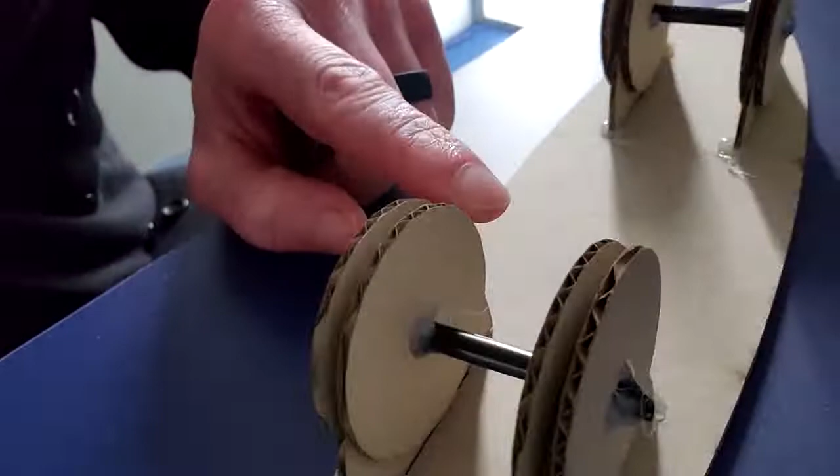Okay, we're going to make this laser cut skateboard. Laser cut skateboard. Yeah. So we've got 2 bits of cardboard on the top for the board. We have 8 wheels with these functional wheels. They rotate there, and 2 straws as axles, and then 4 mounts to hold the wheels on.

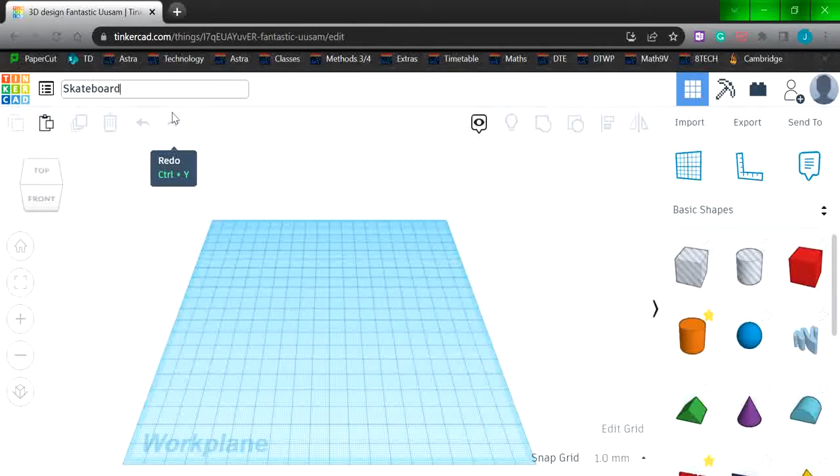Okay, so we're going to make a laser cut skateboard. So click create new design. I'm going to rename this project skateboard. I'm going to change the grid. So click edit grid. We're going to make the grid 300 by 300. And when we're finished, all our pieces should fit in that grid for laser cutting.

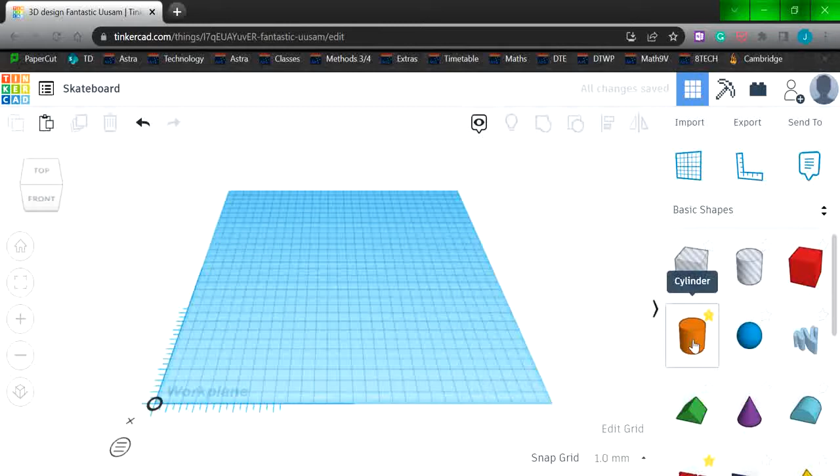Okay, so we're going to first take a ruler and stick the ruler down the bottom left-hand corner of the work plane. And now we have 3 pieces to make. We're going to start with a wheel. So I'm going to grab a cylinder and place that. And this cylinder needs to be 50 millimeters by 50 millimeters. And the height is 2.5 millimeters.

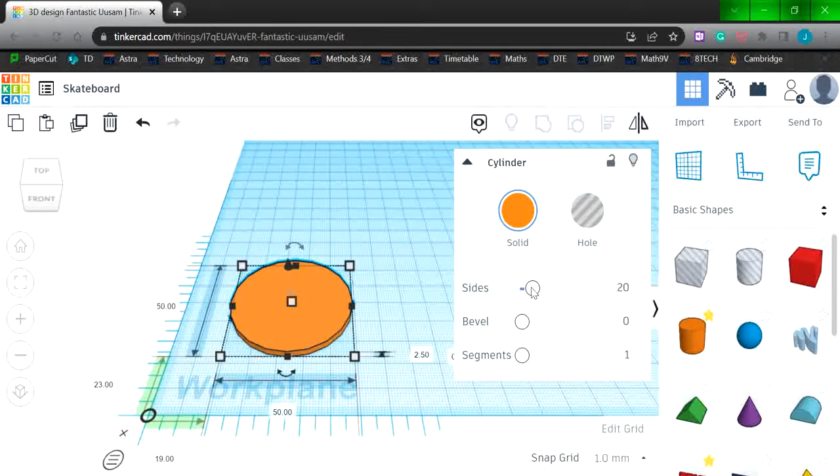The cardboard we have is 2.5 millimeters high, so we need to use 2.5 millimeters for all the thicknesses of our things. I'm going to turn the sides of that right up to make it nice and round. Okay, we need a hole in the center of our wheel. The hole has to have the straw go through it, and the straw is 5 millimeters by 5 millimeters. The height of the hole doesn't matter. You can make that one nice and round as well.

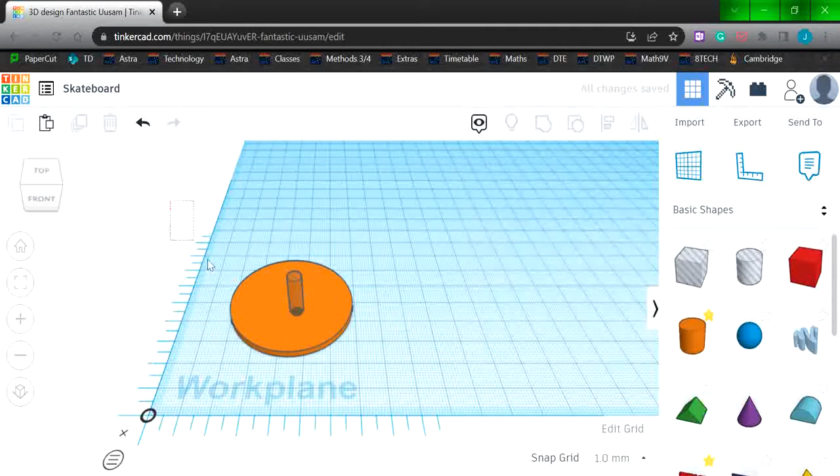And then drag a selection box around both the wheel and the hole. And we're going to use the align tool. So click align up there. We're going to align the centers. So we click on the center, and that puts the hole in the middle of the wheel. I'm going to select both of those things. I'm going to use the group function there to join those together, and that will let the hole cut out the cylinder to make its wheel. Okay, so we have our wheel done.

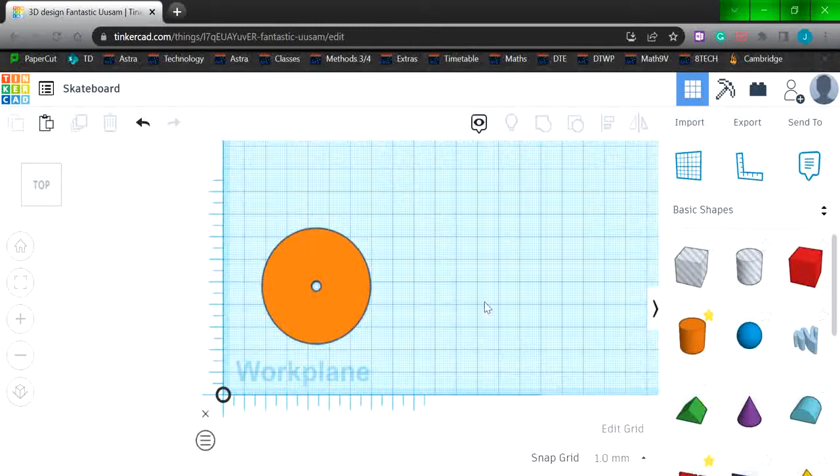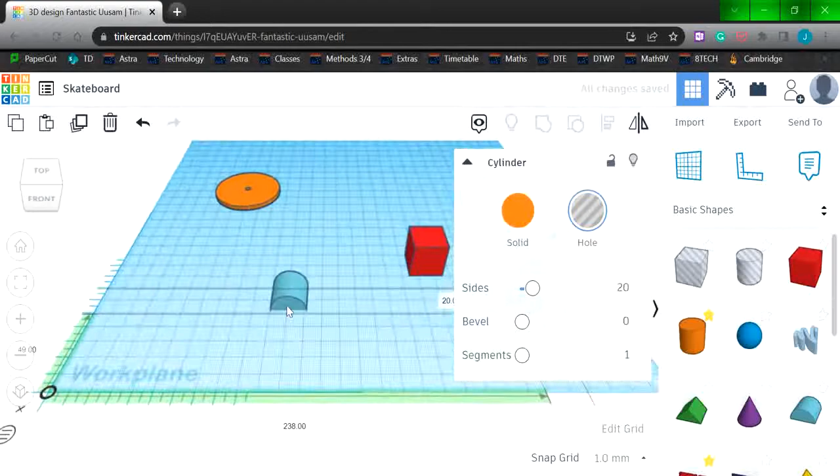Next, we need the mount for the wheel to go through. So this piece is made from a semicircle and a rectangle and a hole. So I'll get those out. Now, our semicircle needs to be rotated 90 degrees. And it needs to be 40 millimeters by 60 millimeters, and it is 2.5 millimeters thick.

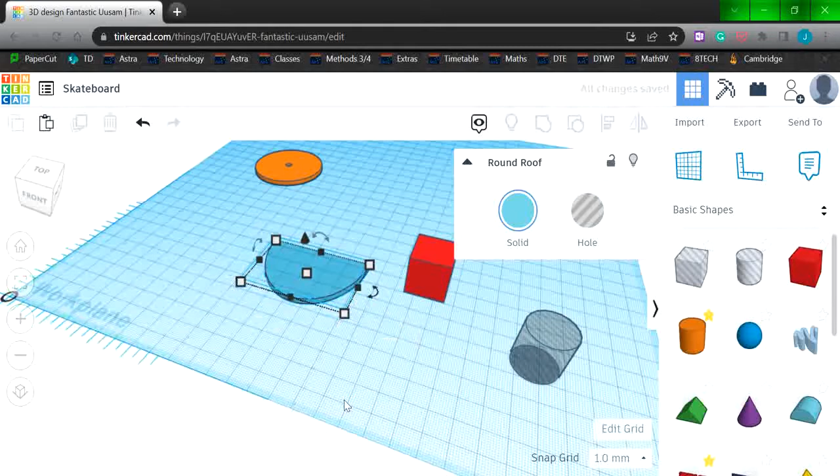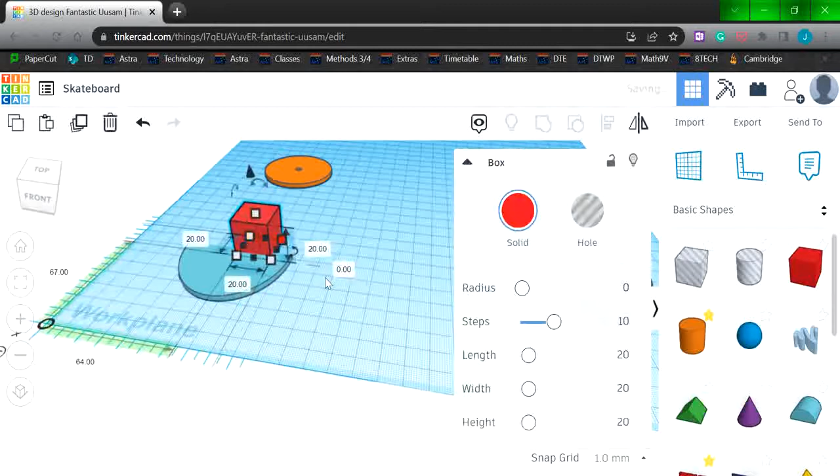And now if you can see, as I move this around here, you can see where it's located based on the ruler, and you can see now at -5 that piece has dropped down below the work plane. So I'm going to make that 0 to put it back on the work plane. Okay, the rectangle now needs to be 5 by 40 by 2.5.

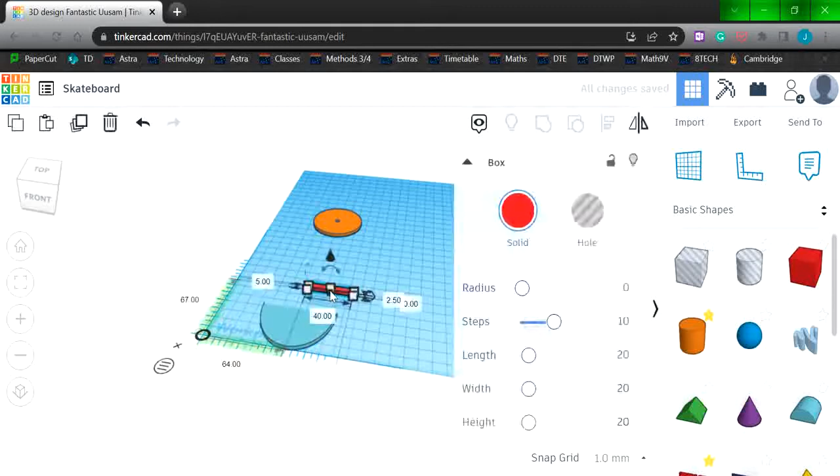And on the ruler here, I'm going to make this semicircle at 0 up, and I can make that rectangle at 40 up, and that will make the rectangle sit on top of the semicircle, and then use the align tool to align their centers. The hole still has to have the straw go through it, so it's still 5 by 5. And it is 10 millimeters high.

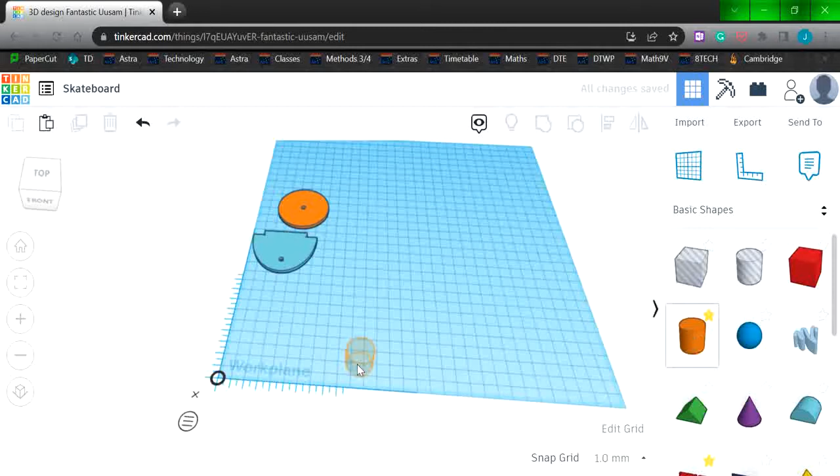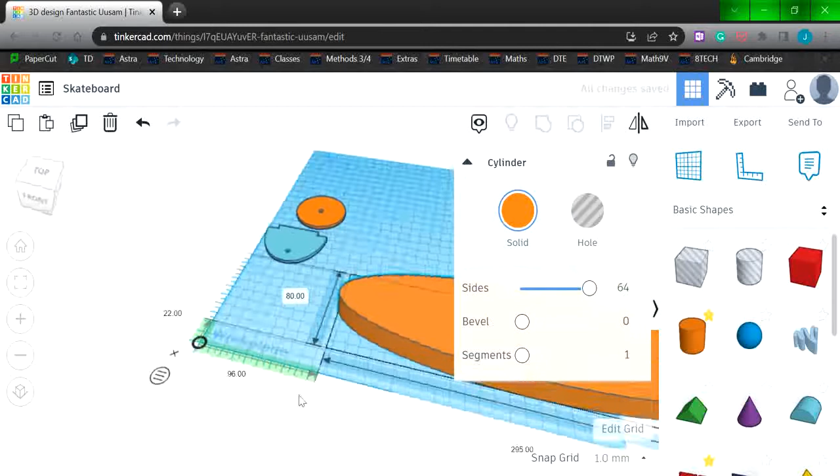And we're going to line those all up now. So all aligned at the centers. And then group those. Okay, so I have my wheel mount done and I have my wheel done. Now I need to do the actual board. So I'm going to use a cylinder for that. The cylinder is going to be 80 millimeters by 295 millimeters. And we're going to turn the sides up to make that nice and round. And we want that to be 2.5 millimeters thick.

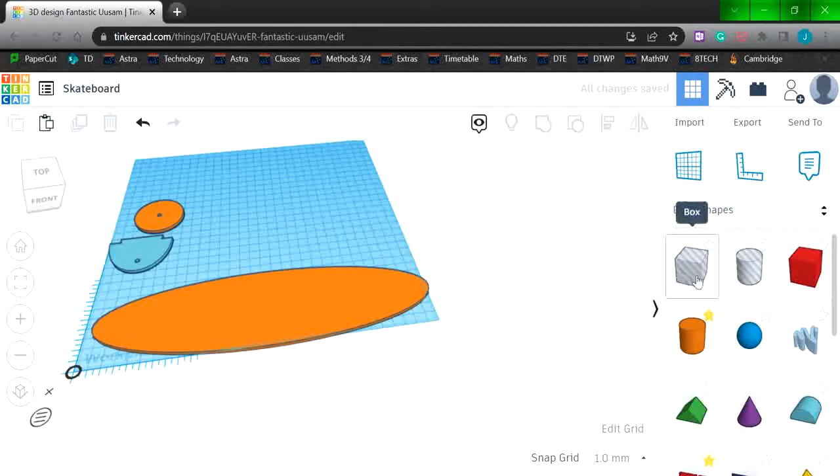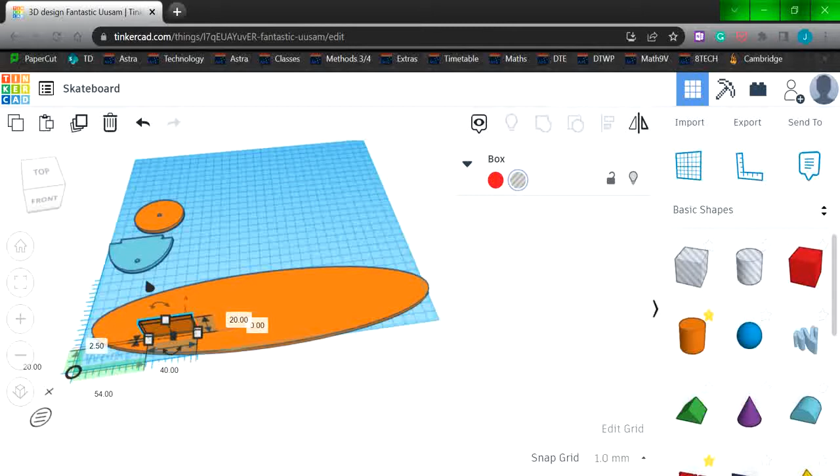And then we need to cut some slots in that so that the wheel mount will go through. So I get a box that is a hole to do that, and that needs to be 40 millimeters by 2.5 millimeters. And then we need 4 of those. Okay, so those rectangles, we need 4 of those.

So Control D to duplicate, and then I want this bottom rectangle here to be at 0 high, and this other rectangle to be at 30, so they are 27.5 mil between them. They're still lined up in their centers, so that's right. Now what I'm going to do is use the grouping tool there to group those. So now they are stuck together.

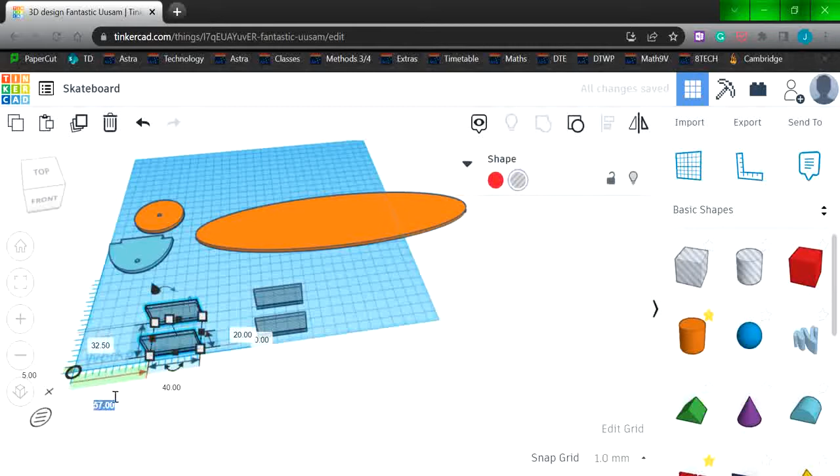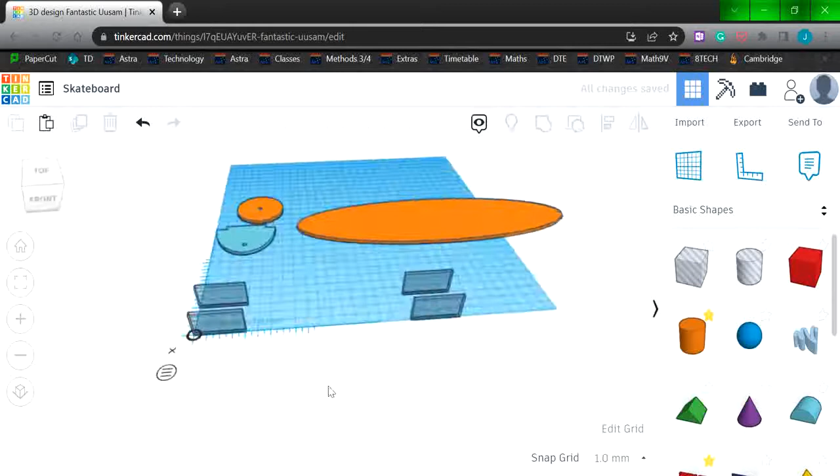And stuck together, Control D to duplicate again, and then I'm going to put this first set in the bottom left-hand corner. And I'm going to put this second set at 175 and also 0. So they're lined up neatly now, and then I'm going to select all of those and group them together.

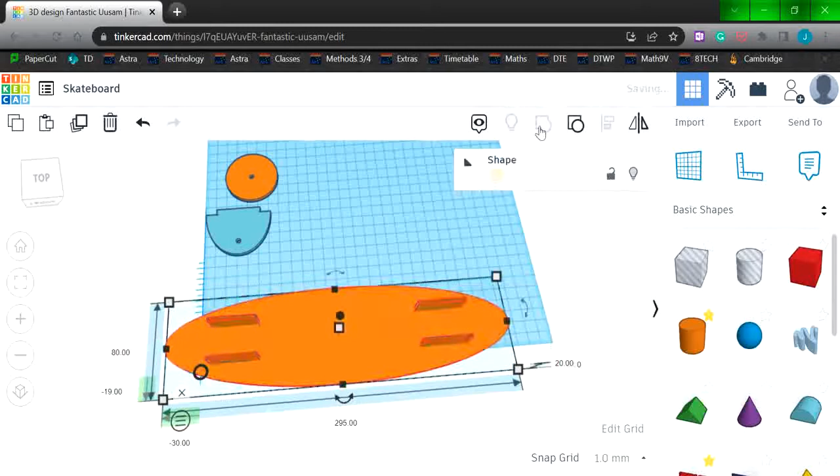And I'm going to bring the board back over here, select everything there, and use the lining up tool. I'm going to line the centers now, so that those slots will be cut out of the center, and then with all of those selected, I'm going to group those together to cut out the holes. Okay. So I now have the top of the board, wheel mount and a wheel.

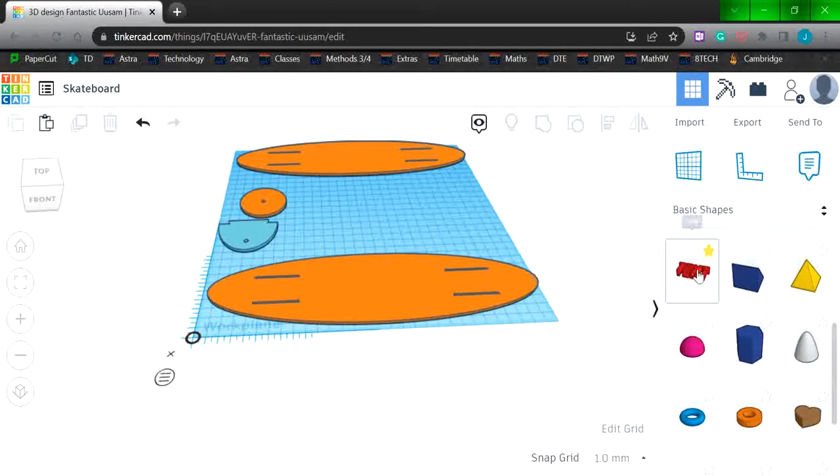The only thing left to do now is to make a copy of the top of the board. So Control D to duplicate, put one over there. And now it's in this layer that I'm going to put some text and whatever other shapes you want to put in there. I'm going to put the word Girton in there. You can put whatever you want in there. You can put your name or something else. So text, I'm writing Girton, and I'll leave all the rest of that the way it is.

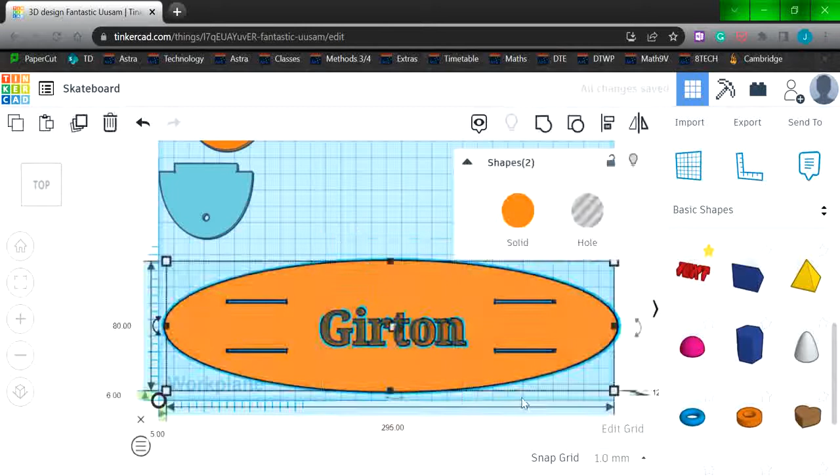What's that doing? Now I'm going to align that so it's in the center again. And I'm going to make the text a hole by clicking hole there, and then cut that out with the grouping tool. Okay, there we go. Now you'll have to be careful depending on what letters you have. You're going to have to fix some of these up.

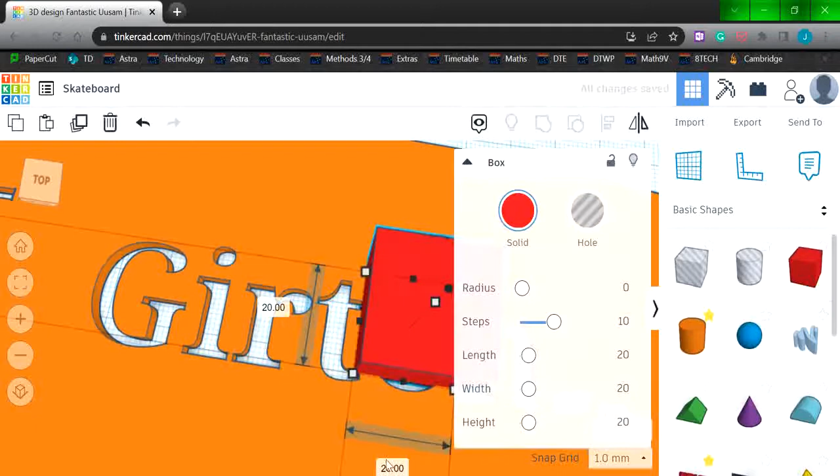So Girton has an O in it. When I laser cut this, the center of that O will fall out, and I don't want that to happen. So what I'm going to do is put a block in here. That block is 1 millimeter wide. The height there doesn't matter. The thickness is still 2.5 millimeters. And I want to line that up so it goes through the center of my O.

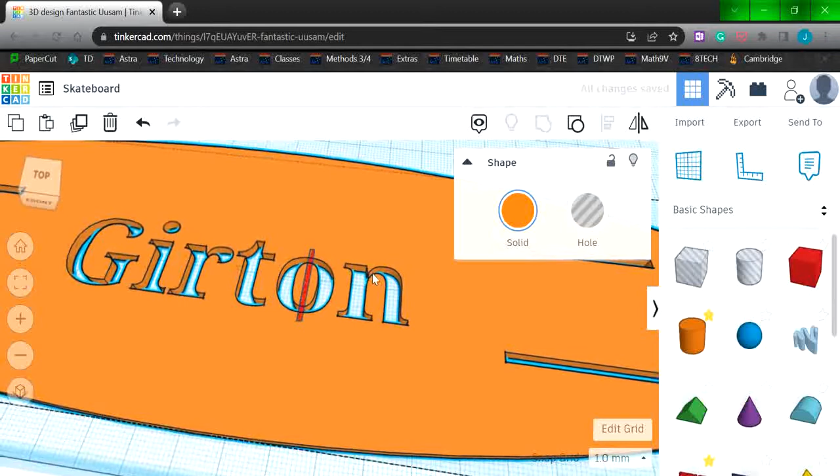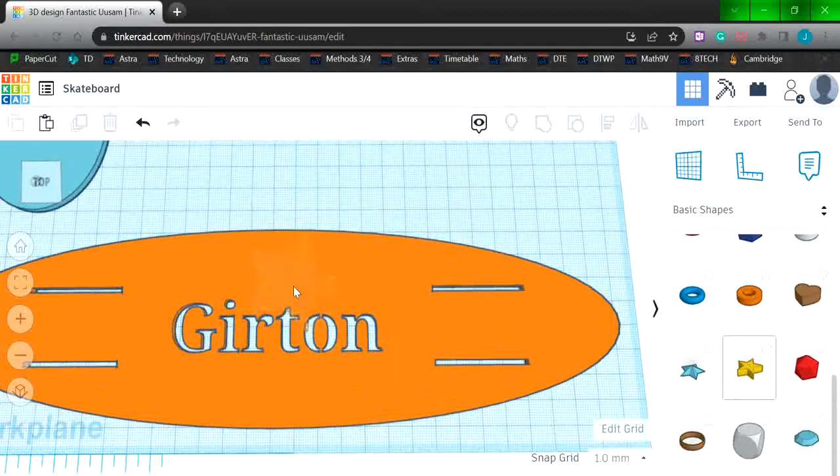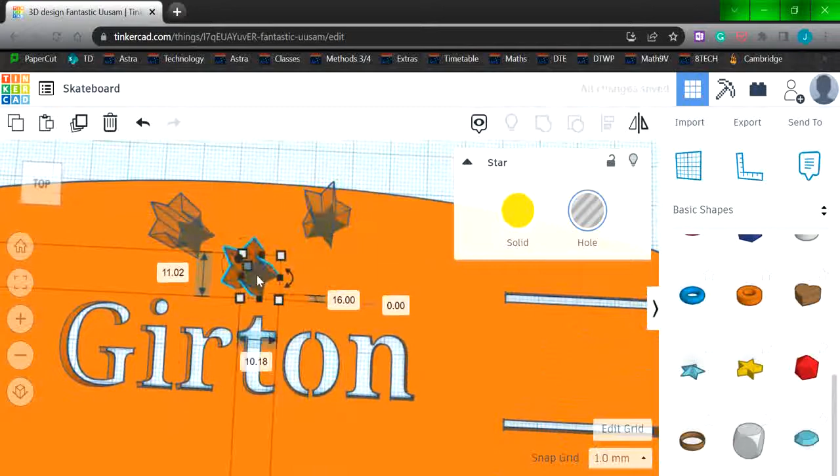So when I join that together now, the center of my O won't fall out. So if you have a letter with a hole in it, like an A or a D or an O, you're going to need to do that as well. Also going to add a star in there, a couple of Girton stars. So make them a bit smaller. And they're going to be holes as well. Okay, and group all of those together as well.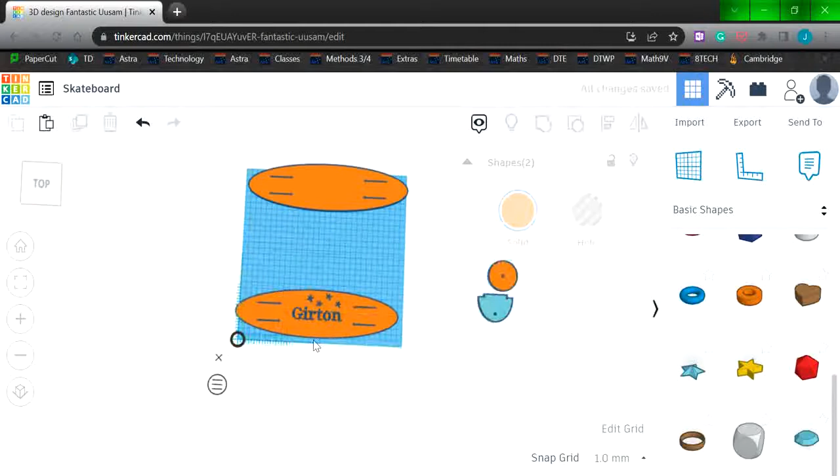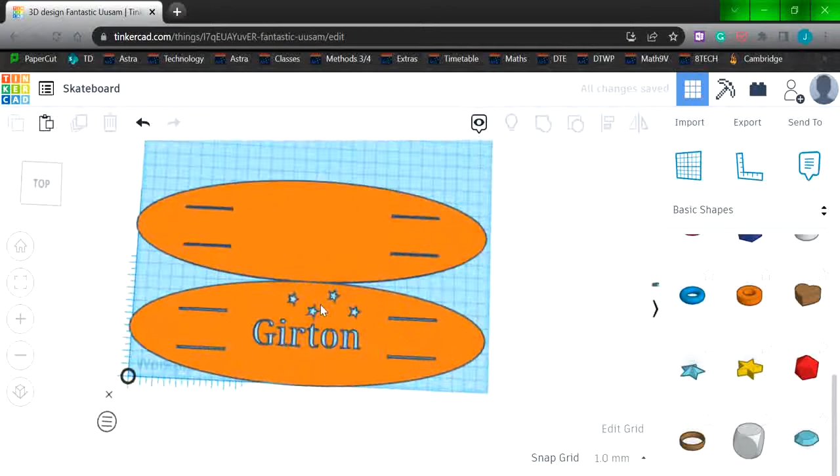And that's it. So I now have 2 bits for the top. I need to have 8 wheels in total, so I'm going to make some copies of those. I'm going to lay all of this out as neat as I can for laser cutting. So I'm going to put this in the bottom left hand corner. I'm going to stick this one next to it, and then get the wheel here.

You want to make 8 copies of that wheel, so Control D, and okay, last step to get that ready for laser cutting. Export as SVG, and that's the file you need for laser cutting.